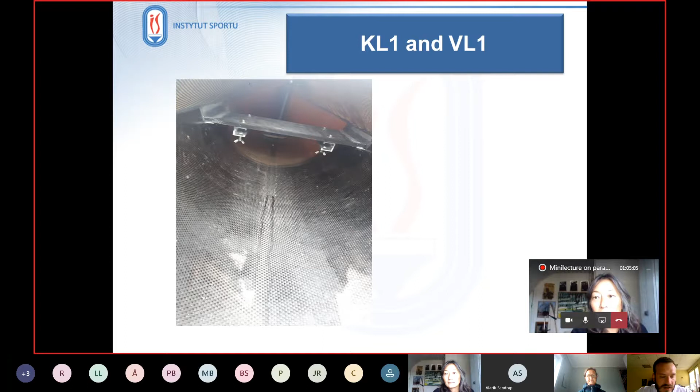That will affect what kind of special equipment, what kind of adaptation we have in the boats. So in KL1 and VL1, what we can find or what we cannot find - footrest is something that not every athlete has because of no leg function.

There's a very high supported seat with a high backrest with straps which fix the athlete to the boat, to transfer the power of the strokes to the boat and to reach the finish line. It's very important that in VL1 there's a very high seat and very high support for the athletes. If we see the VL1 boat, especially on the sides, there's also extra support to keep the athlete in the boat - some specific way of sitting for athletes who are highly impaired in the spinal cord.

There's some kind of almost reclined line on the backrest of the seat, with belts around the abdominals to support athletes to keep balance and to keep themselves in the boat. Also in the kayak or VL1, the goal is to be as tight to the boat as possible - some straps, some special seat which support the legs so they don't move, and transfer the power from the paddle into the boat.

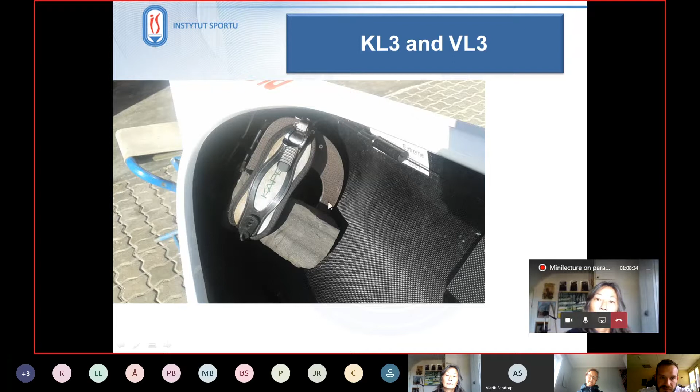In KL3 and VL3, there isn't as much adaptation compared with able-bodied athletes - just some adaptation on the footrest to have similar support from the footrest for both legs if there are impairments, or some support for the legs if there's something going on with the legs, if they have impairments in their lower limbs.

So that's a quick overview of what we can see in the boats, what we can use in the boats. But what I can say from experience is that each adaptation is custom made for the athletes. Each athlete has a little bit different impairments, so we need to find a solution to give support, but also give the possibility to produce as much power as possible and transfer it into the boat as efficiently as possible.

From one direction, we need support to help them stay in the boat, but from the other side, we need to give them as much freedom as possible to use as much power and as many muscles as they could, to produce velocity and reach the finish line as fast as possible. That's the main goal of the adaptation in the boat. If we compare that with the classes, you see that different classes have different types of adaptation - the higher the class, the lower the adaptation, or the less adaptation there is in the boats.

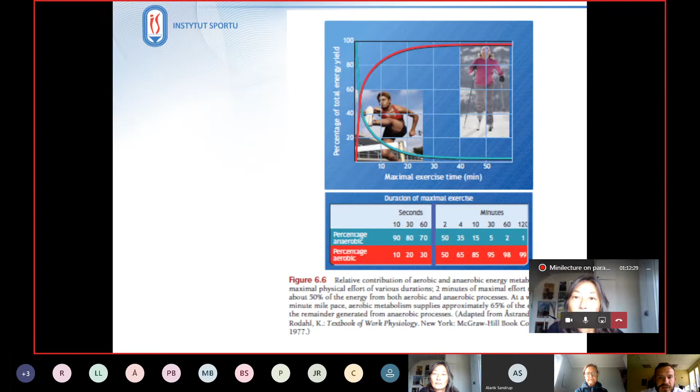So the scientific background for that idea of athlete assessment is the contribution of aerobic and anaerobic energy in metabolism.

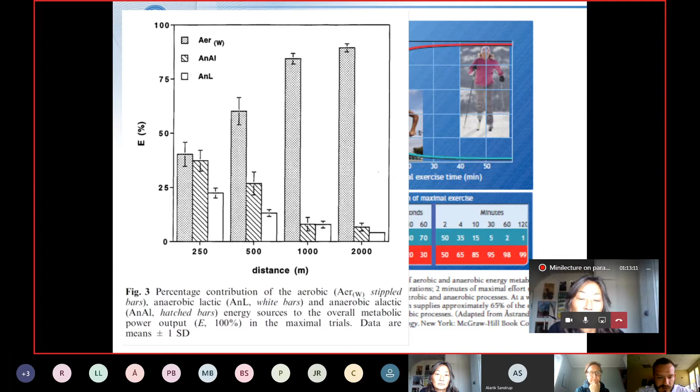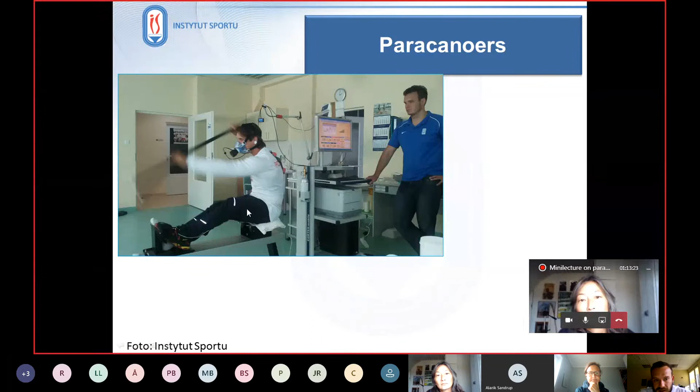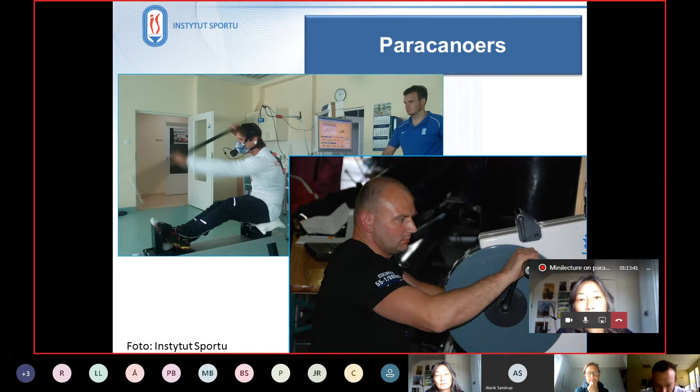In paracanoers, we were doing tests on kayak ergometers to check aerobic contribution, and on arm cranking ergometer to check anaerobic contribution of energy sources, and to see if we are improving those two areas of energy contribution in the athletes.

Our aerobic performance test was an incremental test on kayak or canoe ergometer, or Vasa ergometer in particular for paracanoers. We established power for each athlete individually.

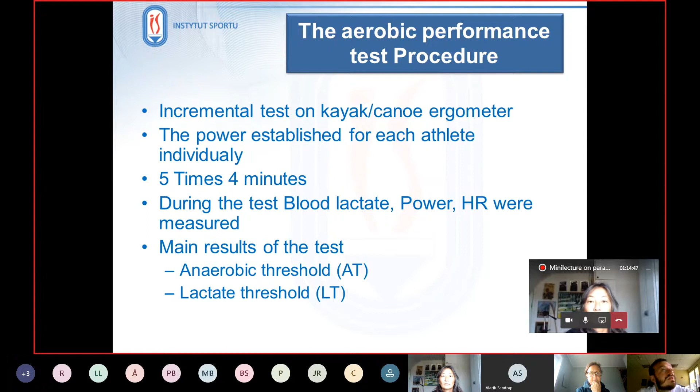It was 5 times 4 minutes with a 1 minute break before the next repetition, with blood sampling to establish lactate and do the lactate curve. During the test, power and heart rate were also measured. As the outcome of the test, we had the anaerobic threshold, lactate threshold, and intensity zones for training, to prepare and evaluate the training on a daily basis.

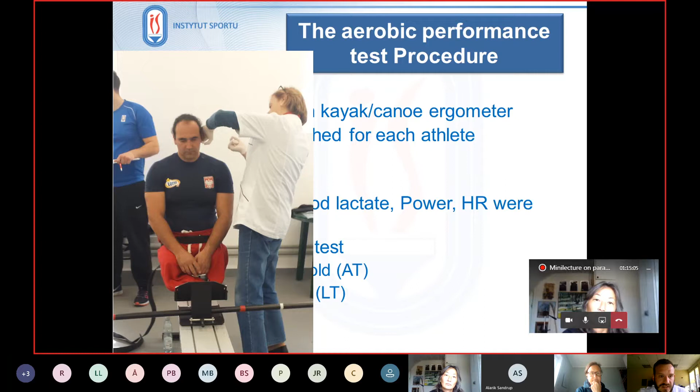How it looks during the break between the next repetition of the test: there was blood sampling to establish lactate, and then just paddling as a kayak or Va'a athlete.

So as I said, some intensity zones were established based on power and heart rate, just to have more information to do the proper training and the most effective way of training.

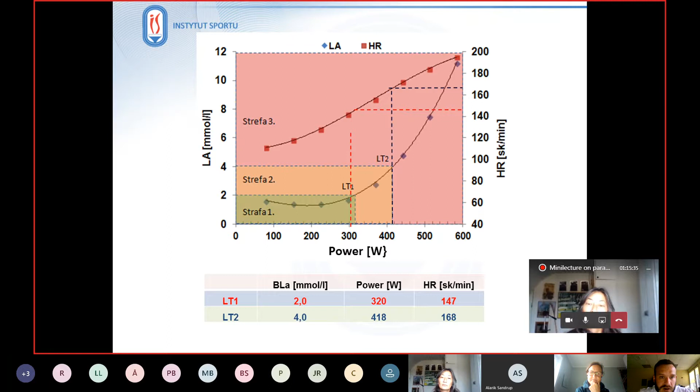The second test in the physiological area was the anaerobic performance Wingate test, adapted for the upper body: a 30 second arm crank ergometry test, where we measure anaerobic capacity like peak power, mean power, and total work.

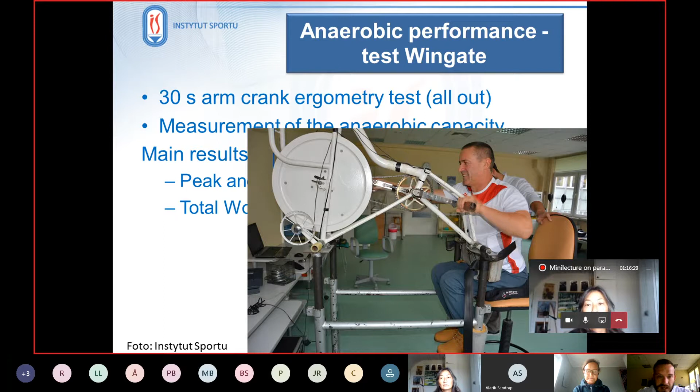That's the position for the sitting athletes. We used some kind of adaptation of the ergometer, and for athletes who can stand, they stay here without this chair, on a standing position, arm cranking while being supported by a belt from the back, just so they don't move too much in the upper body.

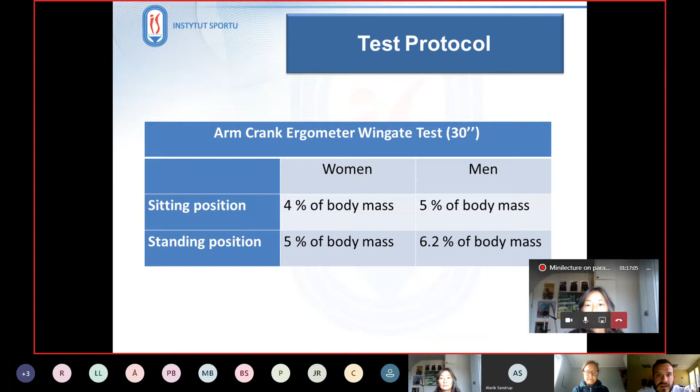We also established the test protocol on a Monark ergometer, in sitting position, using percentages of body mass as the load for the ergometer to establish the best output in power and work in this 30-second test.

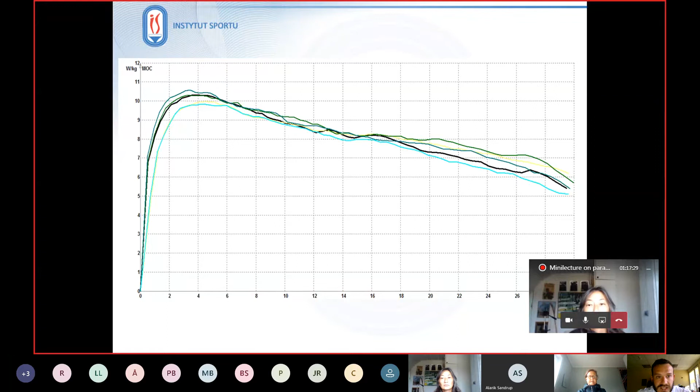Those are some results. As you see, we can chase the results from the first measurement, and we were working on improving anaerobic capacity, so this can be done over a period of time to check if you are going in a good direction.

Some values just to give an overview of how men are differentiated across categories in kayak and in Va'a, and for women, we don't have as much data across different categories to establish reference values for the next generation of athletes.

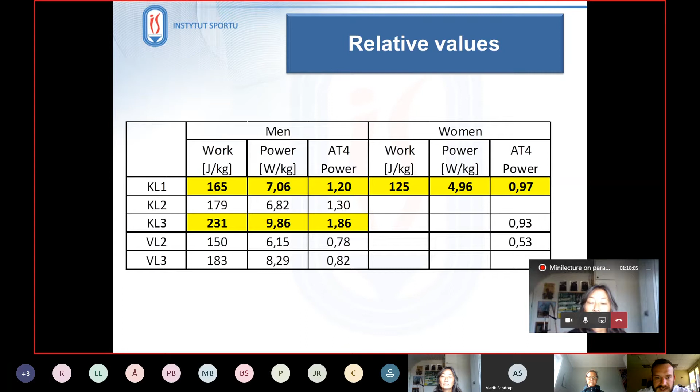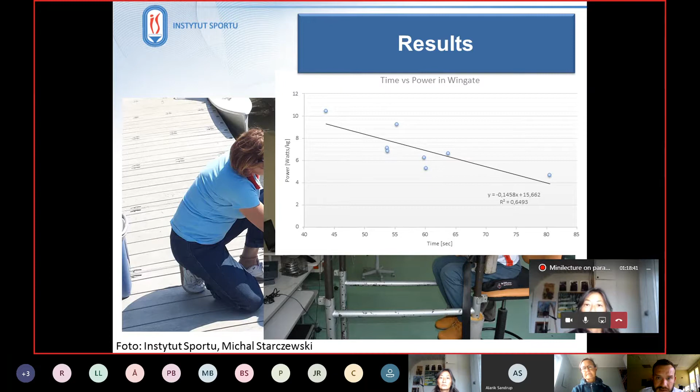We also tested on water just to check if the blood samples and the Wingate test are correlated with performance. We did tests on water and in laboratory conditions, and correlated if there are connections between time on water and power in the Wingate test, and time and work in the Wingate test.

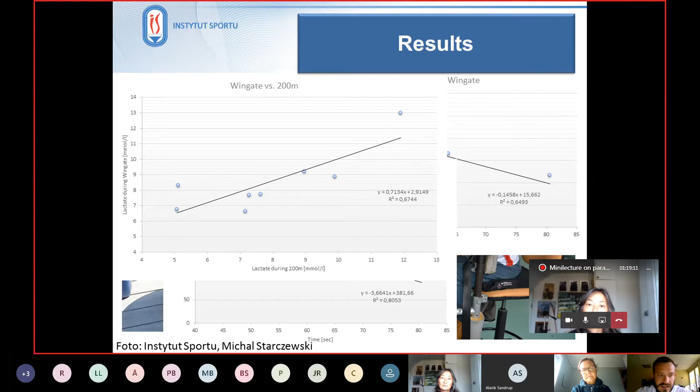We looked at lactate during the Wingate test versus lactate during on-water testing, and found good correlations. So we can say this test is good to check the actual performance of the athlete and assess if the athletes will have good results in the competition.

We can show this in a table, similar to what's found in scientific journals. The correlation is about 0.88, so very high correlation with the time on 200 meters. Our research also showed that anaerobic threshold power, from the incremental aerobic capacity test, is also highly correlated with 200-meter time.

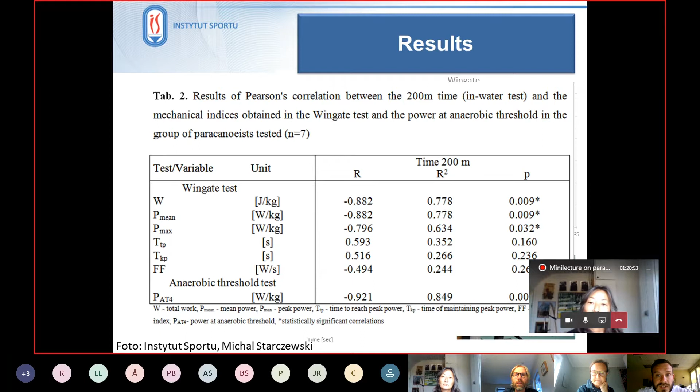So both the Wingate anaerobic capacity test and the aerobic capacity test show high correlation with 200-meter time results on water. That shows our assessment protocol is well established, giving us good confidence to keep it and improve it for the future, to predict 200-meter performance in athletes.

Before that, we also checked VO2 max in our athletes using kayak ergometry testing. Only in a few athletes, as a case study, we established the level of VO2 consumption. It's not so big, but it's not very important in the 200-meter race.

We have a few more minutes, so what else did we do with our athletes? Some biomechanical paddling profiles and training evaluation by physiological testing - biomechanical paddling profiles on the boat.

Anna probably knows better what's going on in the kayak. We did some evaluation on the boat using accelerometers and a few tensometers on the paddle, and the results show curves and profiles of the paddling.

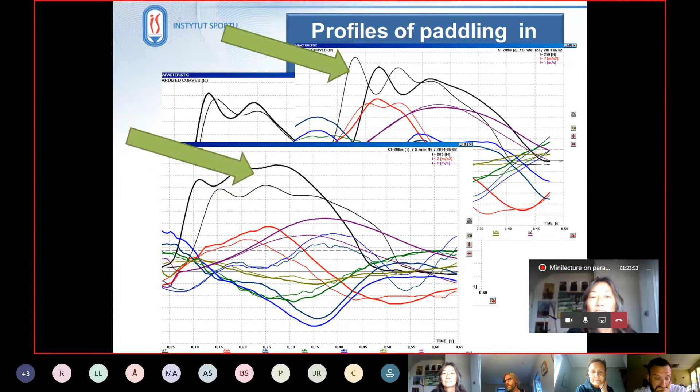We supervised the training using biomechanical and physiological testing during training and after competition. Athletes are tested on water just to check what's going on with their performance and capabilities.

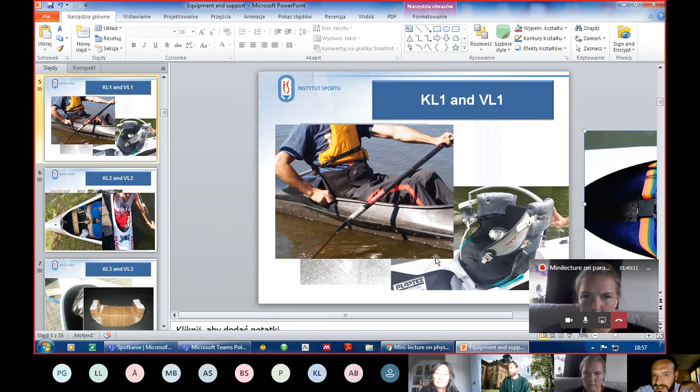This part of the seat is a high supported seat. It's produced by one of the manufacturers of the boats. It's plastic, and it's quite a big seat. They also make a seat which is finished like this on one side, but the other part, from the sides, is built custom made by the athlete and his coach. So this main part is produced by the manufacturers of the boats, and it's adjusted by the athletes and their coaches to support them in the best way.

It's the same with this one. It was the higher seat, but it's cut down a little bit, just cut in this place, to have a lower one so the athlete can move their trunk, for those who can do that.

So who has the best kayaks? Is it Plastex or Nelo, or what company? If we are talking about racing, there are two companies, like in able-bodied canoeing: Plastex and Nelo. During the Paralympics, I think most of the athletes used Plastex, but I don't know which one is better now.